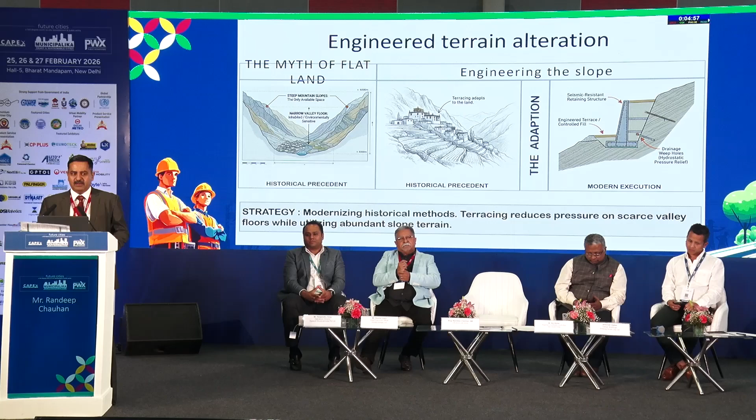The most important aspect there is the terrain. Though by look of it, it looks like a flat area, but actually it gains a lot of altitude. Hence it's very important to do slope stabilization, terrain alteration, like you see all the gompas which have been made there. They are buildings standing there for hundreds and thousands of years. Similarly, the construction activity has to be very deliberate, and modern execution has to follow the basics of slope stabilization. These things have already been done by the military engineering services - their detailed investigation, thereafter stabilization and foundation. These have been taken up on a smaller scale, but what is needed is taking it to the next level.

The next thing is basically the time for foundation and construction. Hence, prefabricated structures are the mainstay of what is going to happen in future. I was just interacting with one of the manufacturers of steel, and we were saying you have to come up in a big way, because all big structures like hangars for aircrafts, helicopters, and big storage buildings all have to be made with these prefabricated structures.

We just listened to a talk about 3D printing. We have made one of the bunkers there with 3D printing, and one more small building is being made. But what is needed of ours is taking it to a higher level, and whether it is successful, we are doing it on an experimental basis. We have also made a plastic road recently, where we have incorporated waste plastic in the road construction. So these are the experimental things which have to be taken up.

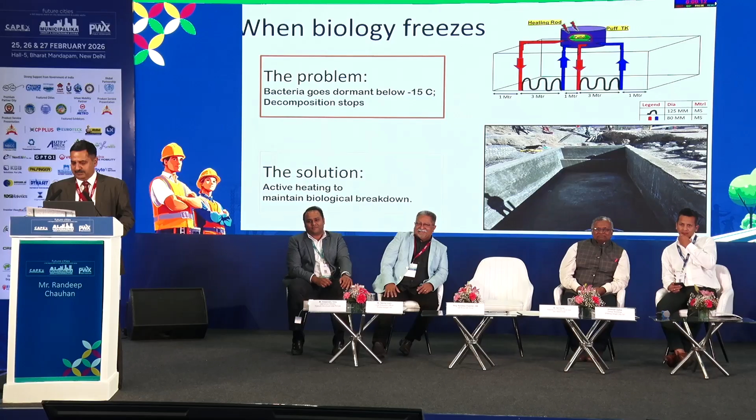Pollution is one of the major aspects. The local population as well as this area is a very eco-sensitive zone. We have to look at the pollution and environmental effects of what we are doing in our construction. Digital engineering and digital twins have been talked about. I want the industry to incorporate these aspects in their designing and monitoring process.

These are the kinds of infrastructure which have already been created not only in Leh but in the forward areas. But these have happened in small pockets. Now we are looking at a bigger area, much bigger infrastructure projects coming up. The way forward is basically we have to have our own engineering design. It cannot be copy-paste from what is happening in the plain areas. A hybrid combination of different technologies has to be done, and research and development has to be part of it.

Gentlemen, here I come to the end, and I will now call the other presenters to present their topics, which are not fully related to this but are in some other fashion. What I want from industry, through the medium of this Municipalika, is that they must come forward and interact in Leh. I am located in Leh. We must interact and look at the future development of this area, which is strategically very important and nationally a very important topic. Thank you.

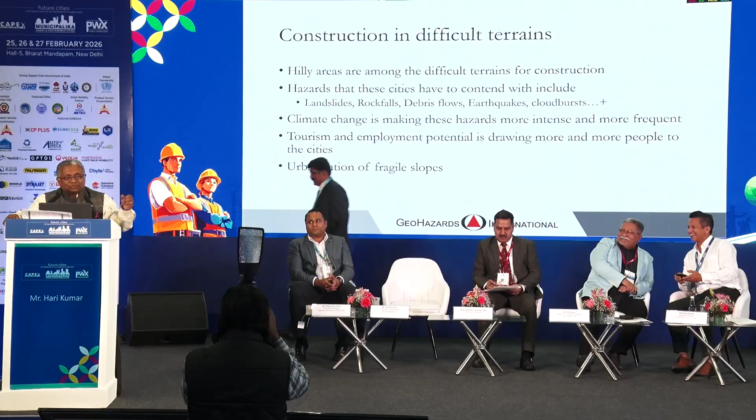And tourism and employment potential is drawing more and more people to hill towns. I was sitting next to our friend from Shillong, who said that the population of Shillong has multiplied several times in the last 10 years. And this means we are urbanizing, and we are building onto more and more fragile slopes. These were our hill towns.

And the last census we have done, the data we have is from 2011. And in 2011, Shimla was only 1.69 lakh people. Shillong was 1.43. Aizawl, the capital of Mizoram, was 2.91. And in those days, the hilly areas were not uniformly in one seismic zone.

Now, most of the cities, including Shimla, have got a double promotion. Shimla used to be in zone 4, and now they are in zone 6. But we still don't have the figures of population. We cannot design tomorrow's infrastructure with yesterday's data. We need data. And that is something we are lacking when we are thinking about future.

In the previous session, there was a lot of discussion about designing for the future. And we really need to understand our exposure, our risk, our vulnerabilities well before we can design for the future. So Shimla, which just got a double promotion, looks very good, which means also that a lot of tourists come in, which creates a lot of employment, which creates a lot of population increase. And if you think Shimla is bad, then I think we should look at some other cities.

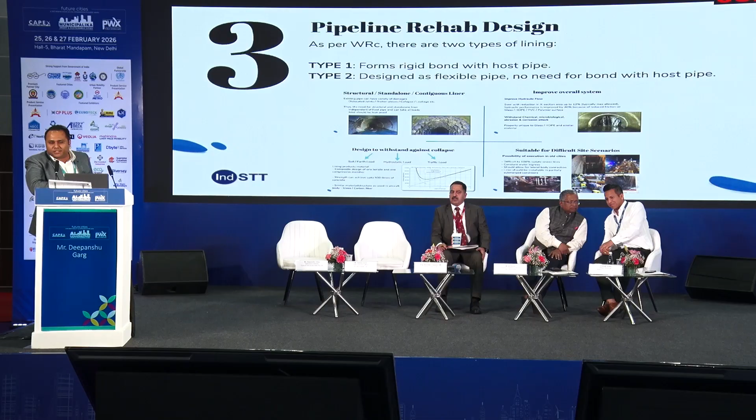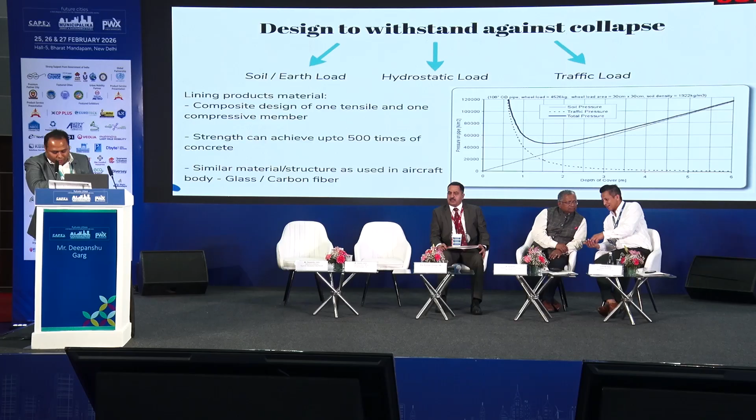So when we do the design for the existing pipelines, we need to understand, do we need a full repair or a local repair? Usually we all go for the standalone, the additional pipeline which we're going to insert inside the existing pipeline, that should be able to take all the load. The loads include the earth load, the water load, and the traffic load. Just to give a pause over here, to give everyone an idea: we are only installing a new liner, a new pipe inside the existing pipe. The new liner is designed to take all the loads applicable on the pipe, and it's designed in such a way that it is there for the next 50 years, if not more. The additional liner should be able to improve the existing pipeline flow.

So these are actual images where we see the joints are open, there is seepage, infiltration and exfiltration from the pipeline, which is not visible to the normal public; we only see it when everything has collapsed. If I may give an analogy, we are working like the bloodstream in our body. We are inside the body, not visible outside unless it is all collapsed and damaged. So it's a prevention method as well, to ensure there is no visible damage outside. So we have to make sure whatever pipeline we are installing inside the host pipe is able to improve the flow and sustain all the loads.

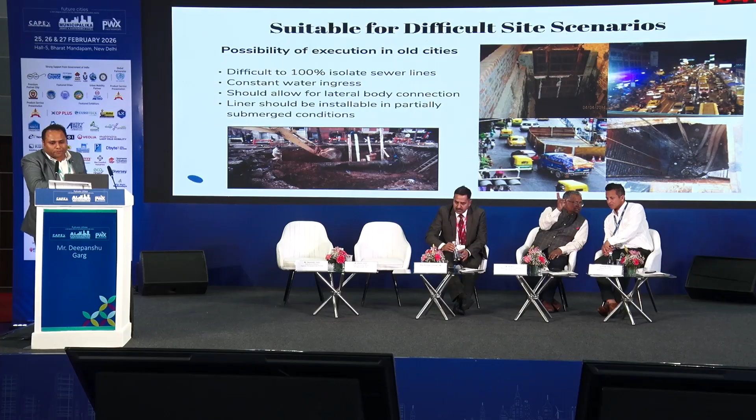This is what a typical job site looks like in an urban setting, which can be matched with the hilly areas as well. We can see the lots of traffic, we can see the pipelines getting collapsed. So when we say we come as a trenchless partner, we mean we don't open cut, we don't excavate the pipeline. We access from the existing manholes, or chambers as we call them. Then from those chambers only we insert the new liner.

Very quickly, you're trying to sum it up.

So these are the typical standalone lining systems available around the globe, among which number one is called GRP, glass reinforced plastic. This pipe is made up of glass fiber, resin and sand. The glass has a capability of sustaining load more than 500 times that of the concrete pipe. The industry partners manufacture the pipe as per the requirement of the host pipe, and we install the pipeline from the existing chambers.

So with the existing pipeline, be it water or wastewater, we have to check whether the pipe is circular or non-circular in shape, and whether the water is flowing or not flowing inside the system while we are doing the repair. Based on multiple parameters, we can pick and choose from the options available in the market.

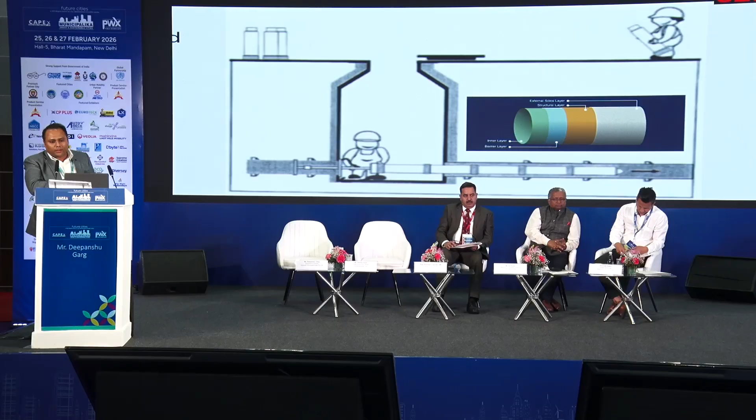The next is called CIPP, cured in place pipe. It comes in a folded form from the factory. Then we insert it inside the host pipe, and we have two ways of curing it. The first is thermal curing, in which we insert the liner, then we pass hot water or steam to strengthen it, to make it cure and take the shape of the host pipe.

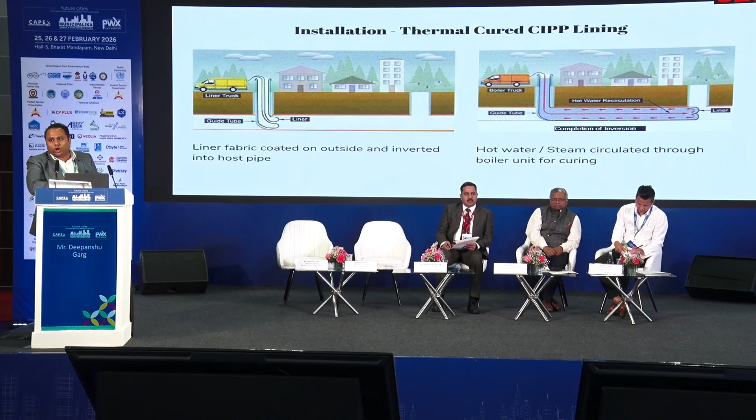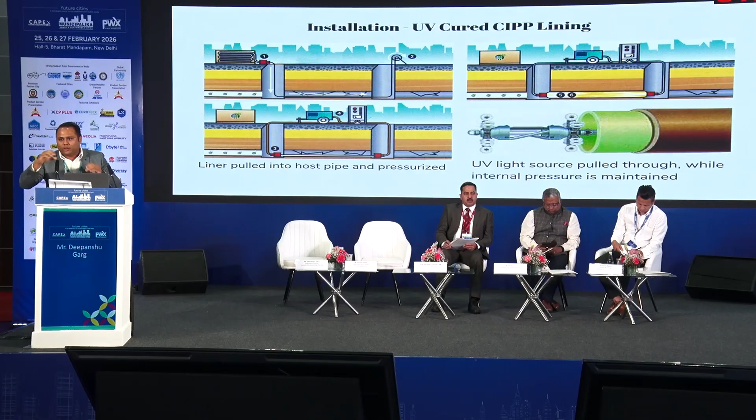The other way is curing by UV rays. We simply use the UV train, we insert the train inside the host, the liner pipe, and we cure it. Again, it's a little more on the technical side, but understand it as a paper form or a folded sheet. We pull it inside the host pipe, we give air to make the shape of the host pipe, and then we strengthen it with UV light.

The next way is MWSL, machine wound spiral lining. Here we use PVC material. It is not glass, it is PVC joined with stainless steel. We do the winding, as we see in the image below, inside the host pipe. Quickly, the next option is FFPP, which is called fold and form pipe. It is typically used for water pipelines, where we have to ensure the liner is safe for drinkable water as well.

The last among the options is geopolymer lining. This is among the new methodologies we have adopted in India right now, in which we spray a specialized cementitious material in the host pipe. This is not spray lining as such. This is an independent material called geopolymer, which is designed to take all the load by itself.